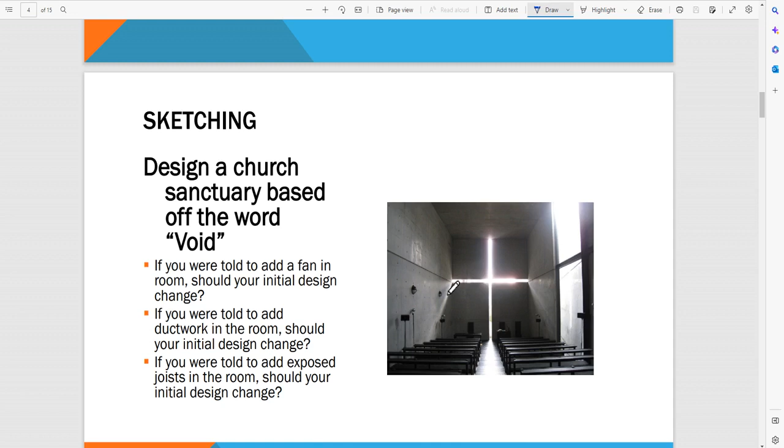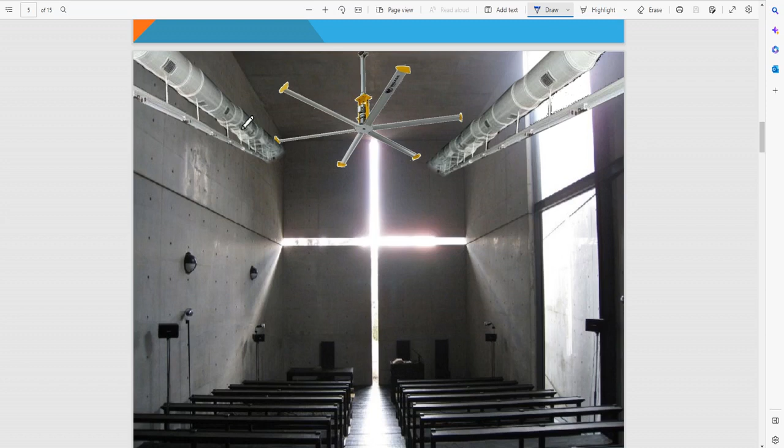But what if they tell you to add some sort of air conditioning to this? What if they tell you that you need to add some structure to this? So what do you think of this image now—here's the vent for the air to come out, but they also wanted to add this fan so it could move the air around. Do you think it's the same effect as the first image? Maybe not, because now there are elements that are distracting, taking away from the clear view of the solemn light from the cross.

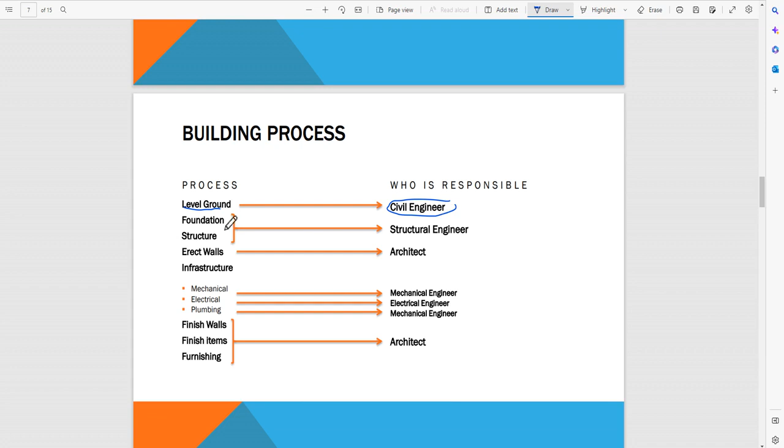So the different areas you'll be working with: in this case, level ground working with civil engineering, and similarly with the foundation and structure you work with the structural engineer. Thinking back to that first video about the foundation and the structure, now we're getting a bit deeper, understanding there's a specific group of people that focus on those areas—this is where the architect or designer comes in when it comes to the walls.

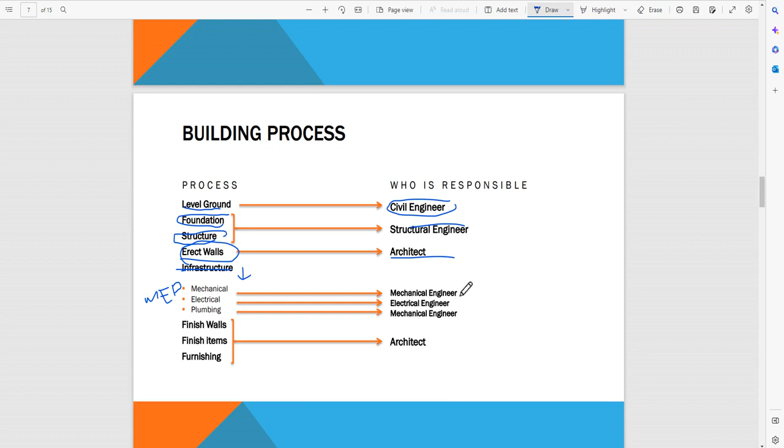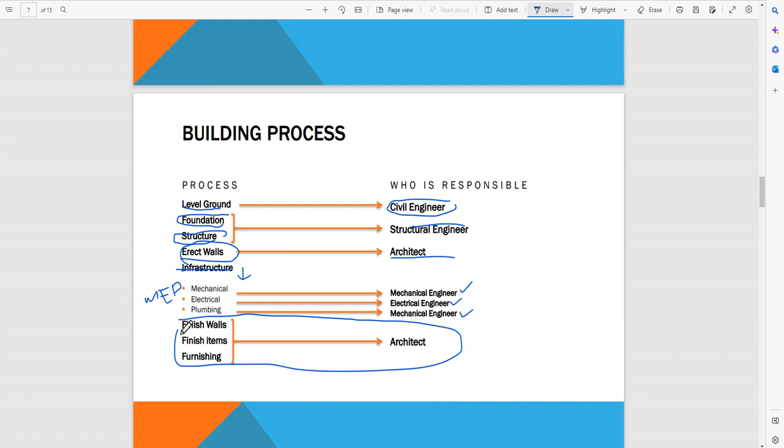But when it comes to the infrastructure—mechanical, electrical, plumbing, the MEP for short—we need to call a mechanical engineer, an electrical engineer, and again the mechanical engineer. And when it comes to all the finishes, the architect or even an interior designer can come in and work on this.

So is the architect really responsible for all these types of systems? Technically, no. You will always work with civil, structural, and MEP consultants, and they are responsible for their trades—that's what they specialize in, that's what they studied, they're working in that field, so they know their stuff.

But as an architect and designer, we're responsible for making sure the original design intent is not lost. That's very important, because at the end of the day there's a design idea, a design goal—you've already talked to your client and you know what you want to do. All these other elements or components are meant to make your building stronger, and not only stronger, but to really make your building work.

We need air conditioning, we need plumbing, we need restrooms, we need a structural foundation for the building. All of these things are extremely important, and if done well, should blend in with the original design.

Obviously, there will always be moments where the design has to change, and as mentioned in other lectures, the safety of the user will always be more important than the design intent or the aesthetics. So if structurally and foundation-wise things need to be changed for the safety of the user, that's always going to outweigh the aesthetic.

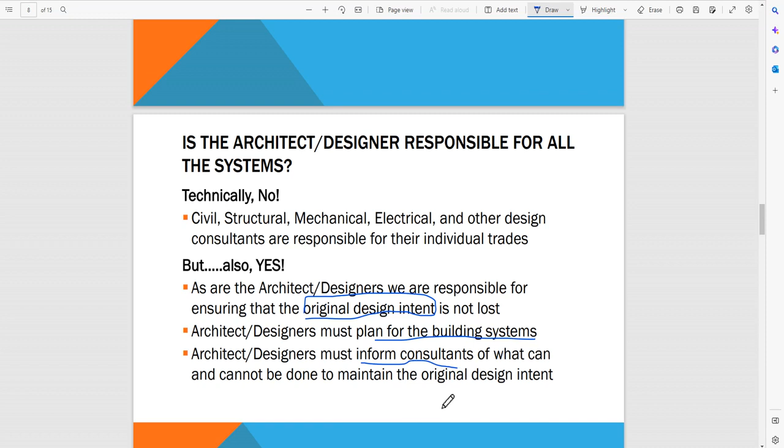So you have to plan for these building systems, and you also have to inform the consultants of what you're really trying to do, so that they can work well with you.

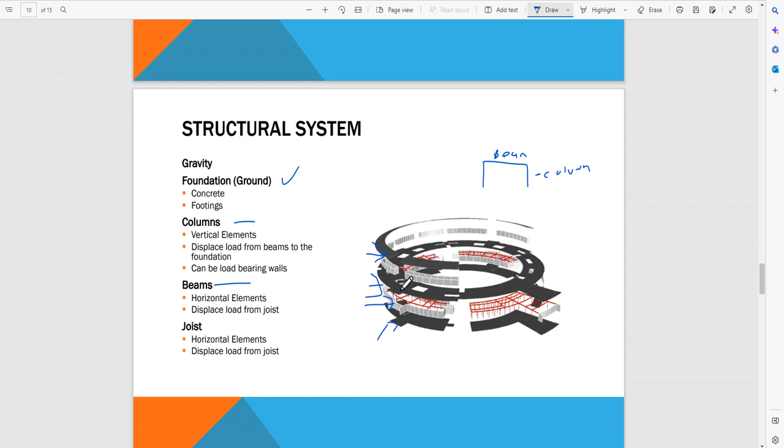These are the types of systems and components involved. Structural has to do with the foundation, the columns - we talked about post and lintel earlier - beams, which are horizontal elements, and the column on the side. The joists also go in a horizontal plane. There are a lot of different components, and the designer or structural engineer can really work well to make this happen.

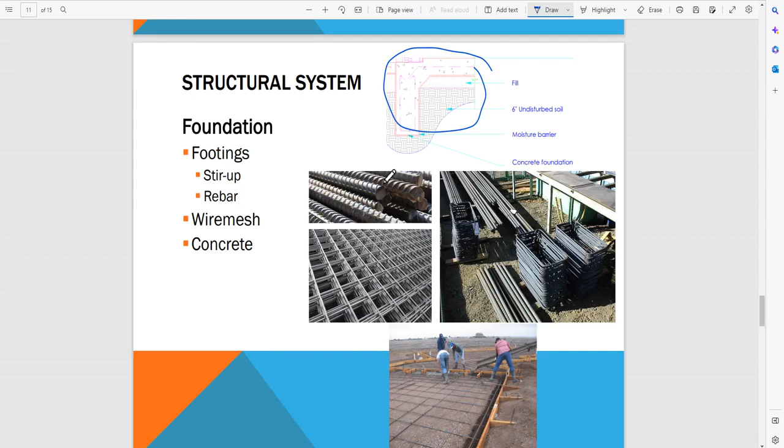Foundation is where it all begins. Understanding exactly what type of footing, exactly what type of soil you're working with - all of these different things are what's really going to make this happen. This is the first stage in the design for the building to come in.

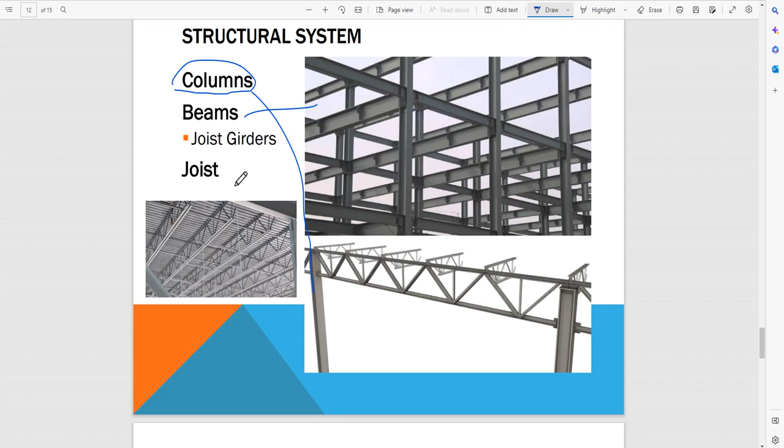Continuing with this idea of columns, beams, joists, and girders, to provide these spans and openings for the structural elements so that the roof and all that can eventually be placed. The mechanical system has to do more with the air conditioning and heating of a room.

There are a lot of different components - where is the unit that's supplying the air? How is the air returned through the vents, and how is the air distributed into the different spaces? Is this visible or hidden? Is it in the roof? Is it in the wall? There are all these different things that need to be considered.

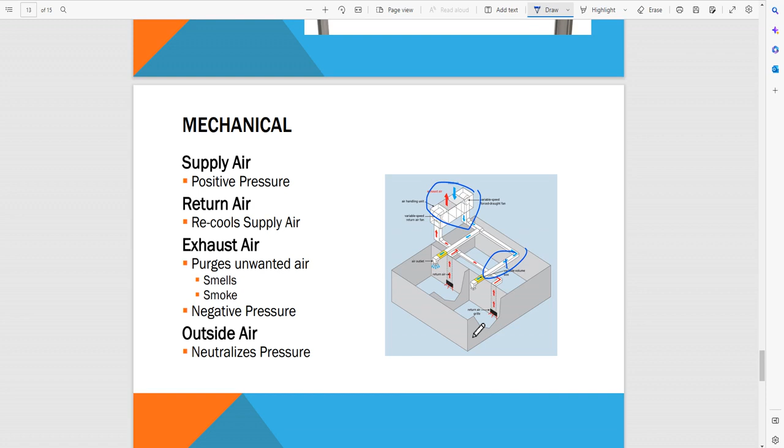This is where clear communication comes in. I would like my unit to be in the roof, or in the attic, or outside. But if it's going to be outside, it needs to be placed so I don't want it visible as people are driving by, and I don't want any of the ductwork to be seen - everything has to be above the ceiling and so on. These are the conversations you have to make it happen.

Another system has to do with electrical. As the designer or architect, you come up with what type of fixtures you're going to use - what type of light bulb, what type of chandelier, or what type of outlets. But an electrical engineer has to know where everything is placed to be able to run all those wires and know how many boxes to put in, and so on.

It needs to be able to create its own plan so that everything is well done. It's not just about wanting pretty lights or a place to charge your phone - there's another component for the engineer to work with you to make it happen.

Plumbing is very similar. Hopefully you've noticed that all of these are essential to the building - bringing water in, taking water out, and putting it back into the sewer. This whole system goes back to the same idea: I want restrooms here, I want plumbing here, I want things to be seen or not seen, and so on. All of that becomes part of the different elements.

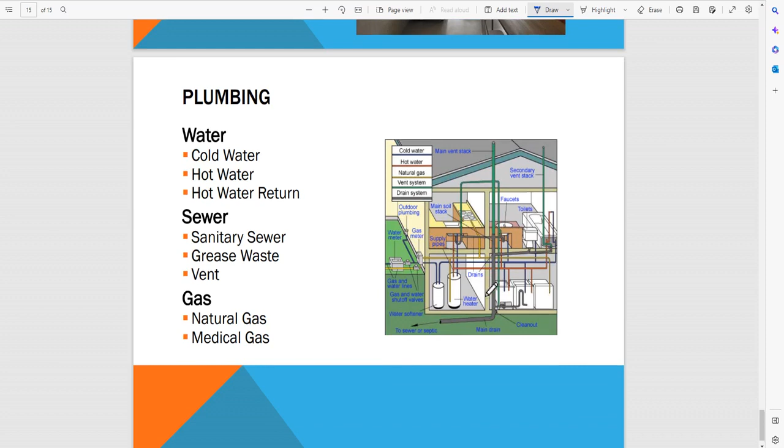So that was the last one in this case. Hopefully it makes sense to you. In summary, understanding that all these different types of systems are still components, still building systems, seen in elevations, sections, and floor plans - they're part of the building itself. Even if you don't have all the knowledge in the architect design field about these things, having certain knowledge and early communication will make your design intents a lot stronger.

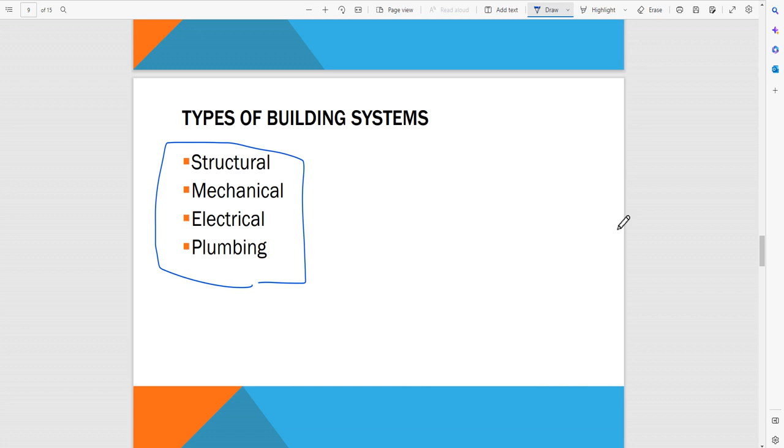Similar to the other video, I'm going to ask you to look around your building and look at these different systems in your house. What type, and where, is the AC unit? What type of plumbing do you have, and do you understand how they did that? Do you understand a little bit of the electrical, like where the circuits are? Try to look into your room and space to understand this type of building systems in your own area. Thank you for watching.